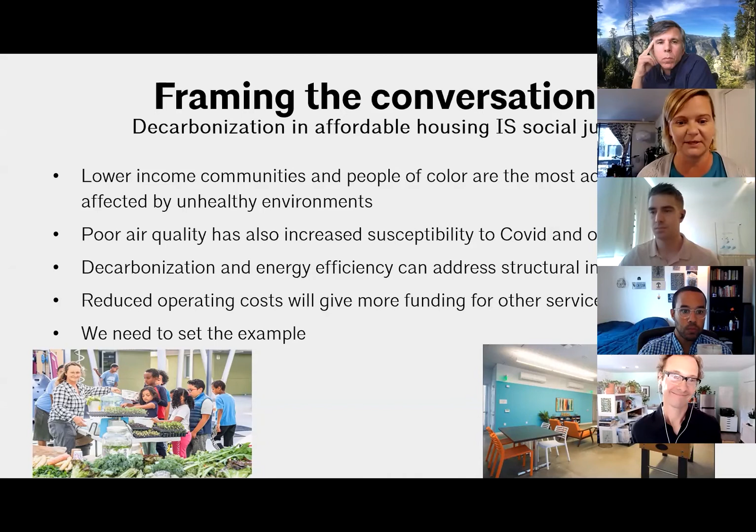The other thing I think we want to talk about today is the future. There's a lot going on that gives us things to think about. But when I think about my goals for building affordable housing, I'm thinking 10, 20, 30 years out, and thinking not only does the housing need to be economically sustainable for the families living there, but we need to think about where things are going.

Thinking about the fact that if we don't all adhere to the Paris Climate Accord and do our part to keep global warming down—and that means every single building—then we're going to be in a catastrophic situation. So the sooner we start addressing it, building by building, portfolio by portfolio, the better.

When I think about the future, I think about buildings like the one you see below, which is one of our buildings that was completed about 5 years ago. They're all going to be energy efficient. This particular building is producing as much solar energy as consumption, so it's basically net zero. I think all buildings are going to need to be like that. The grid's not going to have the capacity to serve the future, so we need to all start doing our part now.

The housing also needs to be in places where it makes sense. There are a lot of smart growth principles I'm sure you're all aware of, but housing should not be in the outlying areas. Housing should be in areas where there's already a good supply of quality jobs, quality transit, schools and parks. When I think about the future, I think about walkable neighborhoods, not sitting in gridlock for 2 hours to get to my job. That's where I think we all need to go as an industry.

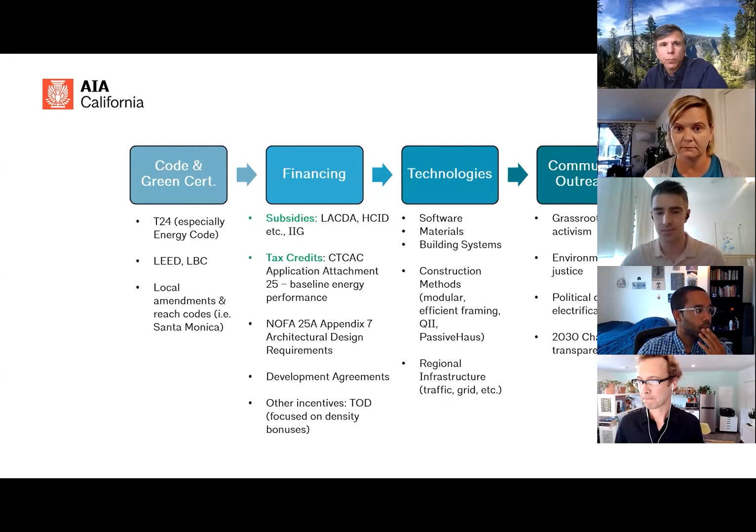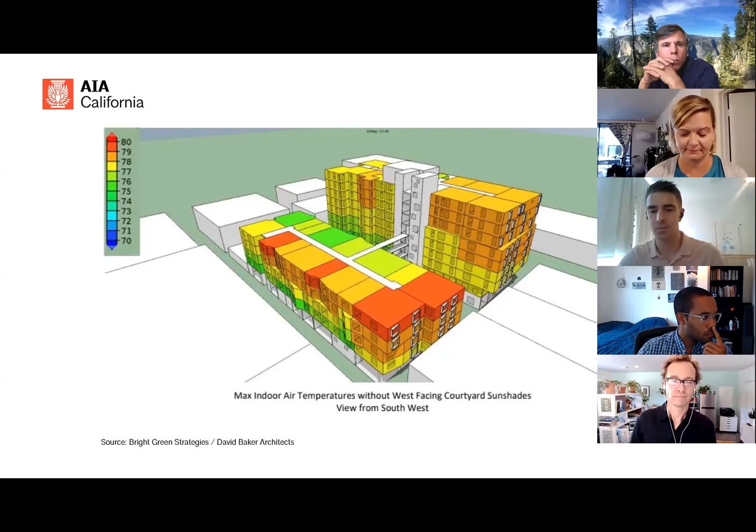This is a really great image by David Baker Architects. It's a simple diagram of units in a mid-rise application, which is what we're generally working in for affordable housing, where units are modeled without sunshades to show which units receive the most solar heat radiation. You can use these easy to understand graphic tools to focus your material investment in terms of where you want to put sunshades and more cost-intensive materials, because we're typically working on fine margins in affordable housing. So when thinking about value engineering, you want to make sure your materials go where they can be most effective.

Team building is another really important way an architect can contribute to the process of decarbonization. It's really about building a great team that has experience in creative thinking, shared values, and probably most importantly, collaboration, because we want to make sure all the team members are talking and have the same goals in reducing energy use and providing the most sustainable, long-lasting building possible.

It's also really important to effectively plan and prioritize to ensure successful results. We want to set ambitious but realistic goals at the beginning that we can achieve with sound fundamentals and cutting-edge technologies, and really decide where we can make the most impact for the least expense. That usually means prioritizing passive design strategies and right-sizing program by putting shared facilities such as play and laundry as outdoor or unconditioned social spaces, so they serve a double function as both building infrastructure and social space that becomes part of the architectural design.

It's also important to consider what makes the most local sense in your area—access to expertise, materials, clean grid energy, and on-site renewables—and to have architectural responses that are climate oriented.

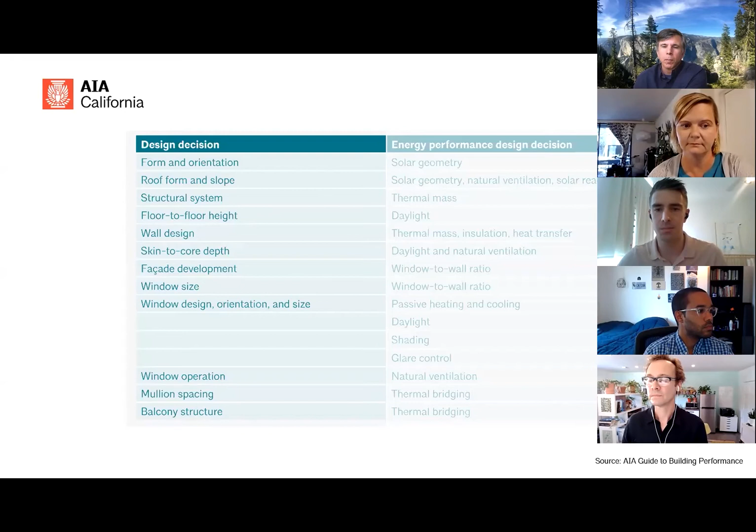When we talk about design decisions, we're typically talking about form and orientation, roof form and slope, structural system, and so on. But I think it's important to think of these as both decisions and the energy benefit we receive from them. When we talk about form and orientation, the benefit we get from an energy use standpoint is solar geometry and access to sunlight, both for powering your PV system and for daylighting in units, courtyards, and planted areas.

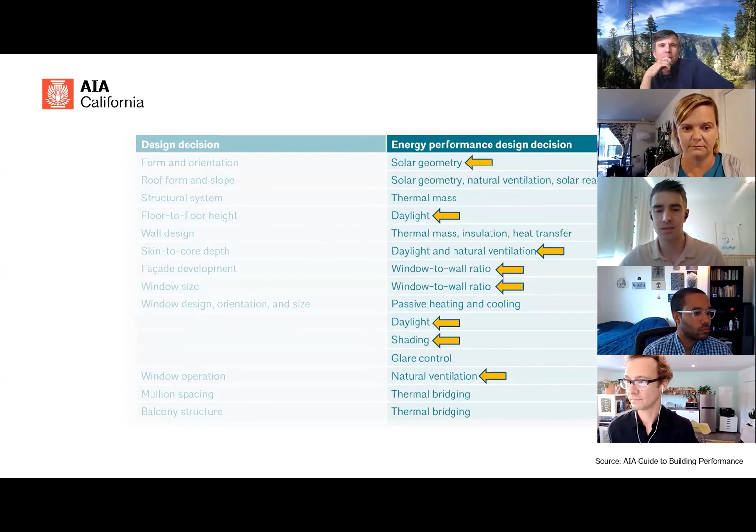That's really what we're trying to do with passive design strategies - cut down on any loads that build up, so you don't have to account for them with active systems.

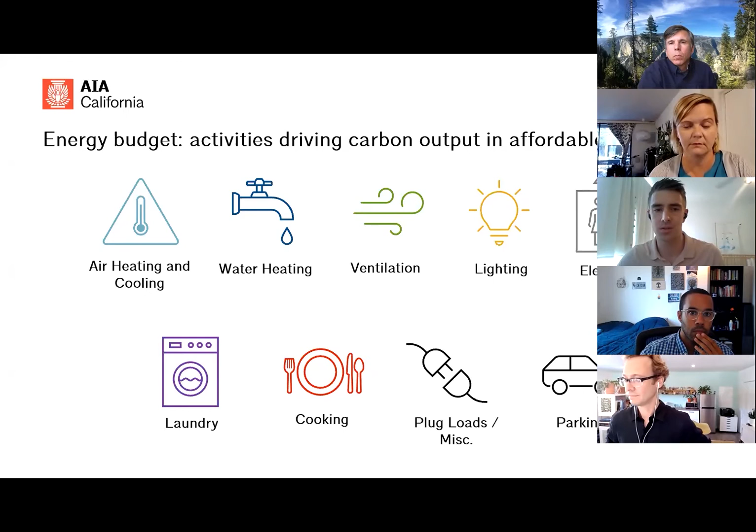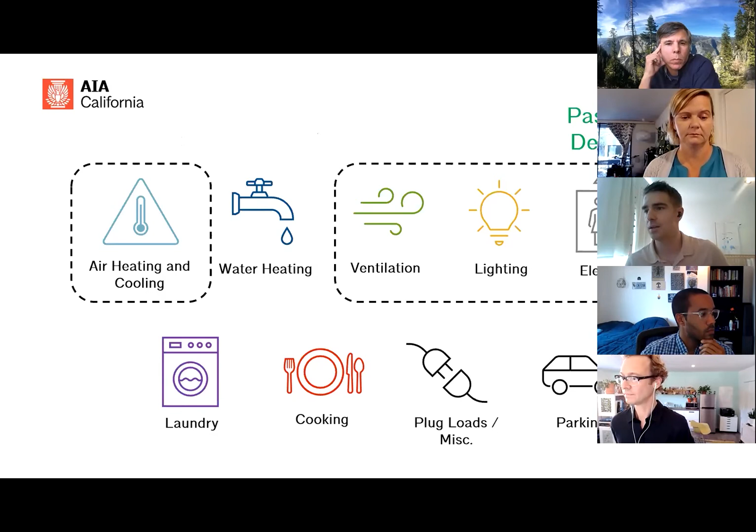Energy use that we can tackle generally with passive design: air heating and cooling, ventilation, lighting, and elevators. Just by proper orientation, proper window-wall ratio, orientation towards views and daylighting, you can really knock a lot of energy use off your baseline.

So these are examples of components of the building where we'd want to address better technology. Water heating is a big topic these days with heat pump technology. SCE is now incentivizing purchasing domestic heat pumps, so it's really a technology that's growing.

Laundry is another interesting example. Generally we provide centralized laundry because it's part of NOFA, one of the financing organizations, so we're supposed to provide laundry machines. But it's also an example of equity - you need to provide infrastructure to the building that really makes it feel like a home, like it's domestic, like you're getting all the amenities anyone could expect in a home.

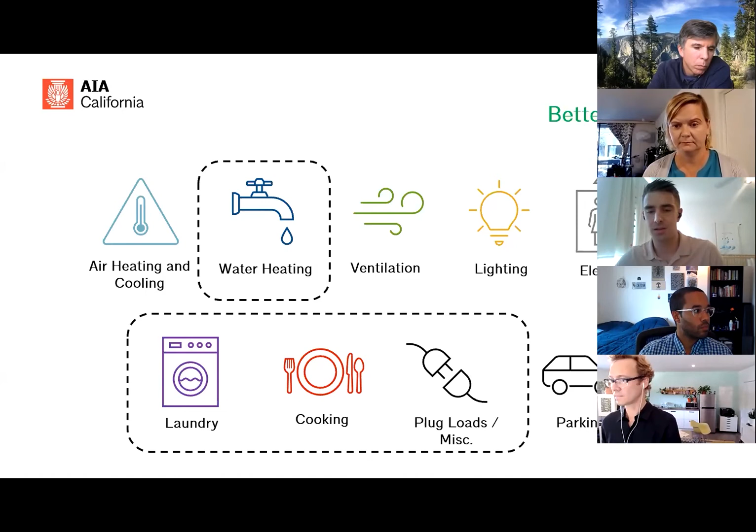So we wouldn't do things like provide balconies that are too narrow, or just a place to hang clothes, because those can feel quite institutional if they're not really good.

This is a project we're doing in Walnut Park in East Los Angeles. This is an all-electric building, and I wanted to point this out because we are designing it with a centralized heat pump system - 2 Colmac units and 3 storage tanks.

The size of the pump room we put on the ground floor was only 300 square feet, with a ventilation grill to the outside for fresh air movement. We were surprised at how small that was for a 58,000 square foot building.

We're also providing ceiling fans in every bedroom and living room, because one of the best ways to prevent someone from using the air conditioner is to provide a ceiling fan. We find it's a very low energy use technology - it's an old technology, and it really works well.

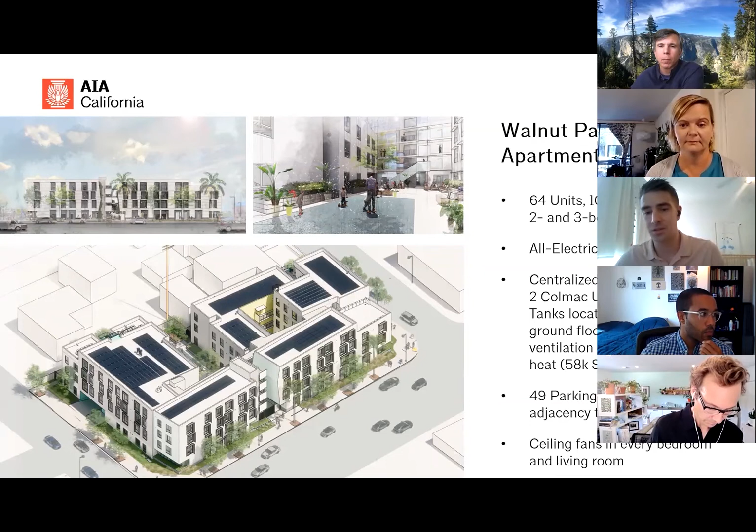This is a building at 1015 Vermont, near Los Feliz, on top of a metro station. Reducing vehicular miles traveled is a great way of decarbonizing housing, and providing a minimum amount of parking stalls required.

We're only providing commercial on this one because it's a mixed-use property with some retail and restaurant. But this is also a good example of how rapidly laws regarding electric vehicle charging stations are changing. There was a new ordinance issued by LA in January 2020 that requires far more EV infrastructure stalls and installed parking stalls required. The laws are changing very rapidly with regard to EVs.

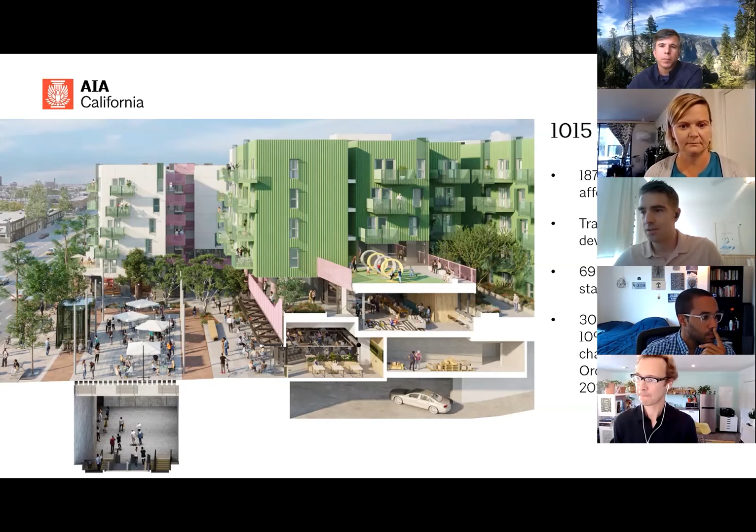This is Flor 401, a project we're doing in downtown Los Angeles. This highlights a number of challenges we face with urban infill projects.

You want to get enough light into the courtyard, so you design a wide courtyard, but you get very narrow floor plates, especially with studio units, which are narrow as it is. If you look at the top right image, you can see how much space is taken up by the maintenance area, the tiebacks, and the parapet-mounted mini-split heat pumps. This takes up a lot of room, so by the time you're able to install a PV array, it's actually quite a small area. You really need to just take what you can get.

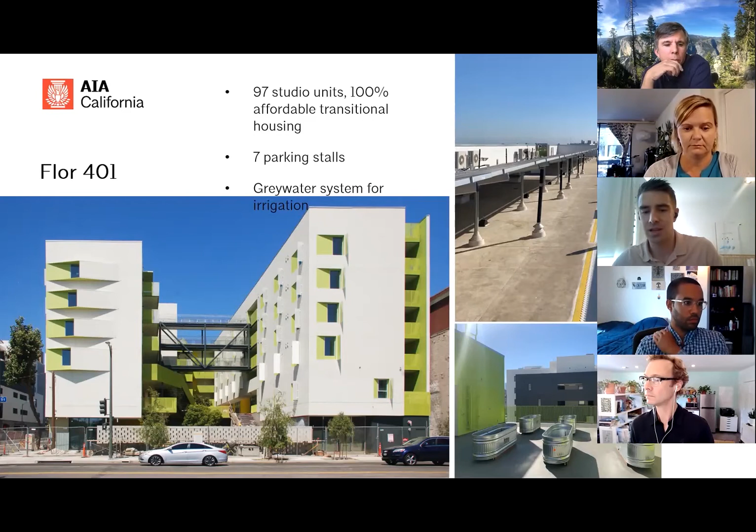I want to touch on materials for a second, because there are fossil fuels within materials, and there's a really great study about how many times fossil fuels are referenced in architectural specs. It's mostly in 4 sections - 6, 7, 8, 9. If you take a look at this small slice of materials and do a good job, you can really eliminate a lot of fossil fuels by choosing the right materials.

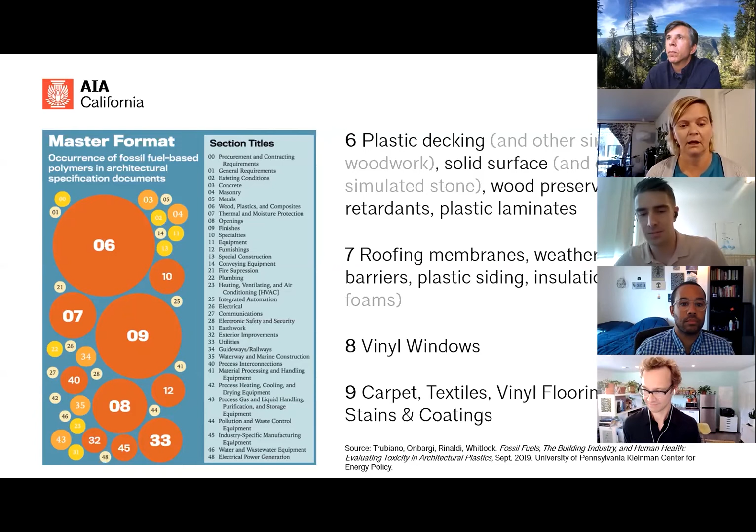Next. And that's pretty much it. I've made a list of other challenges and opportunities, but I'll just hand it over to the next person.

Well, it looks like a little surprise here. We changed the order slightly, but I'm ready to go. Hi, I'm Jason Lorcher with Green Dinosaur, and I hope everyone can hear me okay.

Next slide. So obviously today there's a lot of conversation of what the new normal looks like after the pandemic. And for the purpose of our roundtable discussion, I'd like to pose the question for everyone here on the call: how do you envision our industry will evolve?

At Green Dinosaur, we've pondered the question ourselves. For us, it's a new normal of an all-clean, all-electric path that creates opportunities for people in our world based on social justice. It's really time to evolve how we design, build, and work. We're hoping to get some of that today with all of you in this conversation. Next slide.

So I'm going to review two projects with everyone. Both projects were envisioned around the same time frame, around early 2012, 2013. So they've been 7 years in the design. From design, they've probably been in operation for the last 4 years.

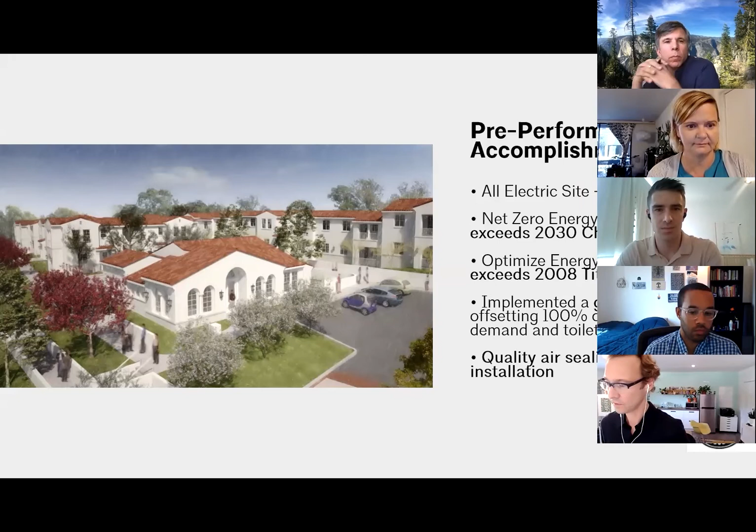So doing an all-electric building, you really want to focus, as John mentioned, on the envelope and your materials and shading, and really bring the energy down. In this job, under an older code cycle, it was achieving 50% better energy performance, and that's before you even take into account photovoltaics. Next slide.

So we had the Silver Star Apartments. That was a 49-unit, formerly homeless vets project in Los Angeles, also targeting Living Building Challenge, and was all electric.

Once again, this project had a similar design of mechanical, electrical, and plumbing systems to go all electric with domestic hot water heat pumps, also with a sizable photovoltaic array on the roof - a 160 kW photovoltaic array - and split system heat pumps, super high efficiency as well.

Next slide please. Kind of a final note, looking at this overall diagram, you can see photovoltaic panels on the roof, and it's exceeded performance by 50%.

So we're looking at these projects that were under 2008 Energy Code, 2013, 2016. Now we're in 2019, looking forward to 2020. Also very excited to see the AIA submission backing an all-electric design that was submitted recently to the CEC. I wanted to mention that as we move through these different code periods, as the time-dependent values have become more stringent, we could expect maybe a 50% performing 2013 project to maybe look like 5% better than 2019 Energy Code. Just a side note. Next slide.

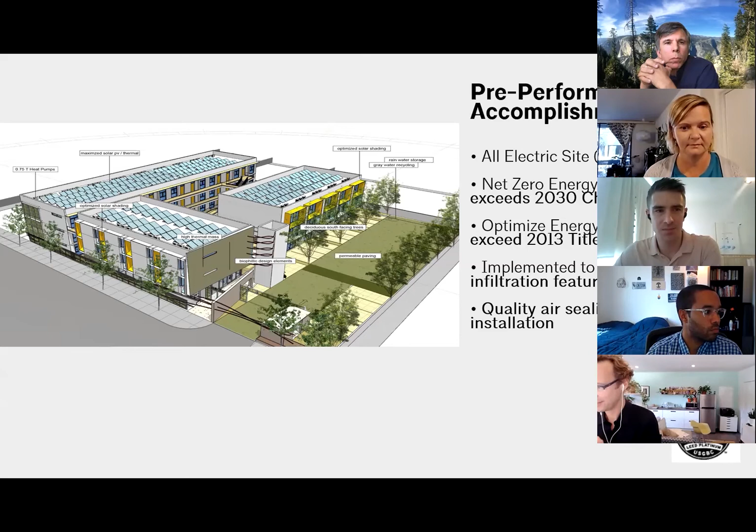I'm going to talk a little bit about challenges and opportunities. Some things I wanted to mention: conceptual design and understanding how energy use is a big factor at this stage of a project. Everyone's well-versed with how to run charrettes and make project goals. Early energy analysis takes place to understand loads and how to orient, mass, and site a project. This is nothing new, but there are complexities we'll need to engage utility companies on, like the demand on electrical service size.

I want to make one plug here for a company called Redwood Energy. They have a great guide that initiates conceptual design goals, called the Zero Emissions All Electric Multifamily Construction Guide. We'll provide that link later, but there's so much information out there right now, whether from the Rocky Mountain Institute or the Living Building Challenge, about all-electric buildings, that should really help our industry move things forward.

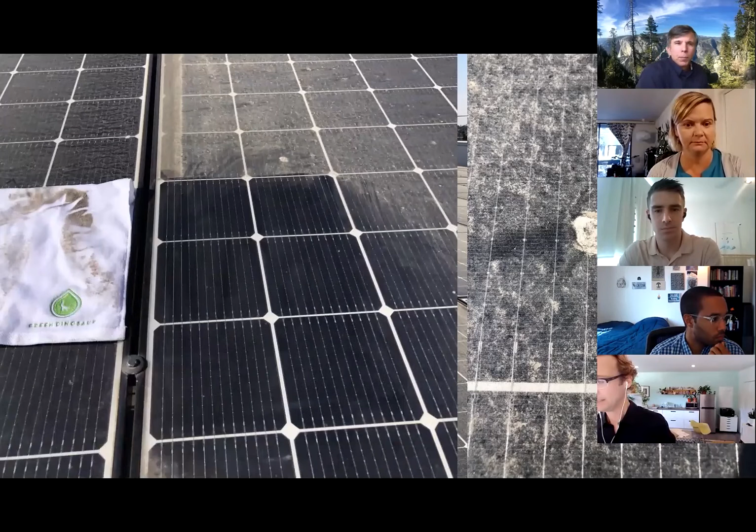Another feature, as you wipe down, you see how they would look when clean. This residue was probably over a 4-month period, which is about a 15 to 30% reduction. A lot of affordable housing developers on the call might be saying, well, how do I budget for the cleaning costs and all these things?

Quite frankly, there's a lot of challenges to make sure that we can continue to achieve the performance on these high performing buildings.

Then it comes to the next challenge and opportunity of accessibility, maintenance, and positions of solar systems. It's so important to verify and maintain systems. If you're walking up 3 stories to get to inverters, I know we have everything tied into an IP address, but if you really want to verify that inverters are calculating the production of the panels and you're going to maintain it, you need to think of these things up front and make it a priority during design.

That goes true with balanced ventilation systems, fan coil units. As architects, we always want to hide all the beautiful mechanical systems, and that makes me sad, but we've got to figure out ways to do that.

Another challenge and opportunity we can probably discuss in our roundtable is the ongoing training. Since this was primarily focused on decarbonizing housing and affordable housing, the technical expertise on maintaining the buildings is slightly limited, and we really need to work with everyone.

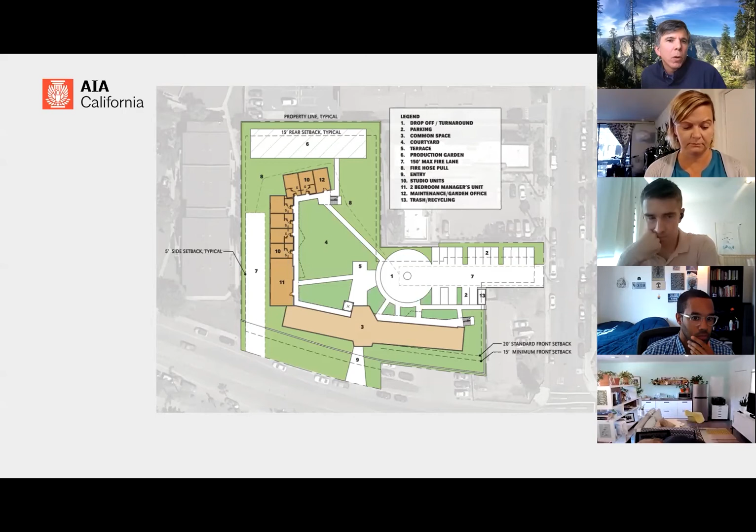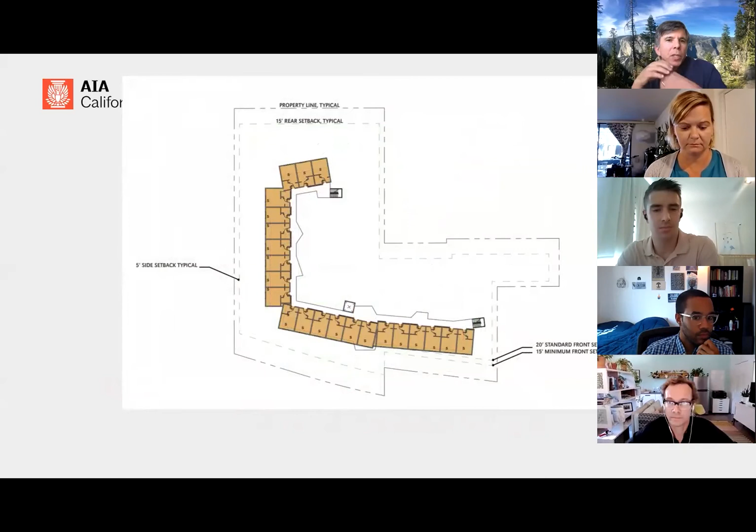So let's take a look at how we approach our projects. There's a couple slides here, courtesy of Studio E, who we work with down in San Diego—some projects we've finished and have ongoing with them. This is San Ysidro Senior Village, a 51-unit, 3-story project centered around a courtyard. It's housing for the formerly homeless in San Diego.

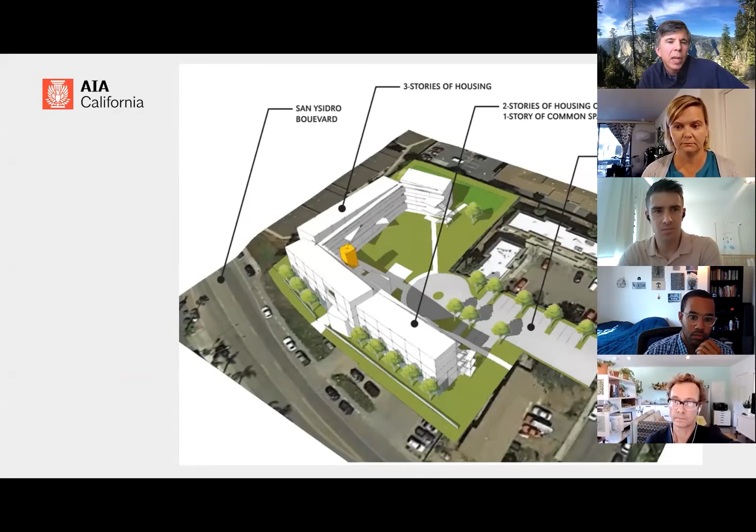And it's built on a shoestring budget. So when we looked at this early on, the architecture team came up with a strategy to maximize use of the site, create great outdoor spaces, and what we like to call some signature architecture. But we had to do this on a budget, and I always have goals for deep use and deployment of renewable energy systems. So on calls with our design teams, they constantly hear me say, I like that idea, but I really want renewable energy. So we've really got to conserve in the way we approach this.

The key to any good process is a study of the economics. It can't just be landing on ideas and the newest thing, saying we've got to do this, even if we're talking about electrification and carbon neutrality. What we have to really focus on with the affordable housing community are the economics of this.

So before we get in, let's look at this economic analysis I did for San Ysidro Senior Village. You do a conceptual energy model, and I'll show a slide of that in just a second, and you take that energy use profile and plug it into something that will identify what your operational energy costs are going to be.

So, 51 units of special needs housing, master metered. My operational energy costs for this project are going to be $56,000 a year. This is what the development team is going to plug into their budget, right? On a normal day, $56,000. So then I look at it and think, that's a lot of money. We'll take a closer look at that.

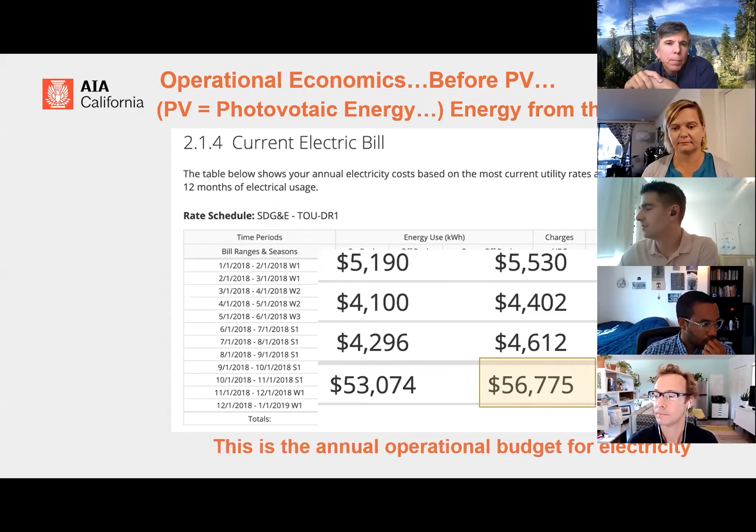So to look at this a little more closely, what we need to do—hit the next one. So designing for PV now, Title 24, I call this PV 101. This is what we all need to be doing. This is a new project we're starting, or this is still San Ysidro Senior Village.

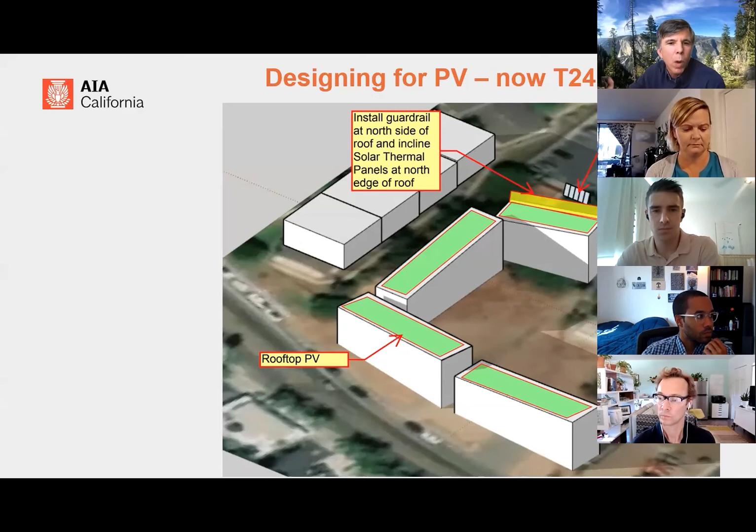We started looking at the way we would deploy PV on the project, and maybe the way we would use solar thermal, because the project was conceived with natural gas originally, and then we started wandering into the AIA 2030 challenge. And we hand that off to our architect.

And what the architect does for us is come up with these ideas to get it on the building in a way that we can then look at the renewable energy footprint versus the utility grid footprint.

But this has meaning for us. So when we look at the architecture of this, it needs to breathe sustainability. It's important, right? But to me, it doesn't matter—if it makes the point and it's sustainable, it's going to be more poetic.

So when we finished the project and landed as much PV on this building as we could, it tells a really compelling story for us, but that's a coincidence. It's important to me, but it doesn't need to be featured. It doesn't need to be in your face.

What's really important to me is getting back to the economics of this. So when we start new projects we want to keep in mind our long-term targets, and we're looking at reporting to the AIA 2030, the AIA-DDx. So, a zero net energy building, or very close to it, with a lot of PV on the roof—I thought I should be doing pretty good, right?

So anybody looking at the DDx is used to the energy use intensity, the predicted energy use intensity. That's my number, my predicted number from my energy model when I was all done. That was my goal—I was supposed to be at 9. I was at 23. And I'm slapping myself and the team on the back saying, hey, that's a great project, we almost got to zero net energy building.

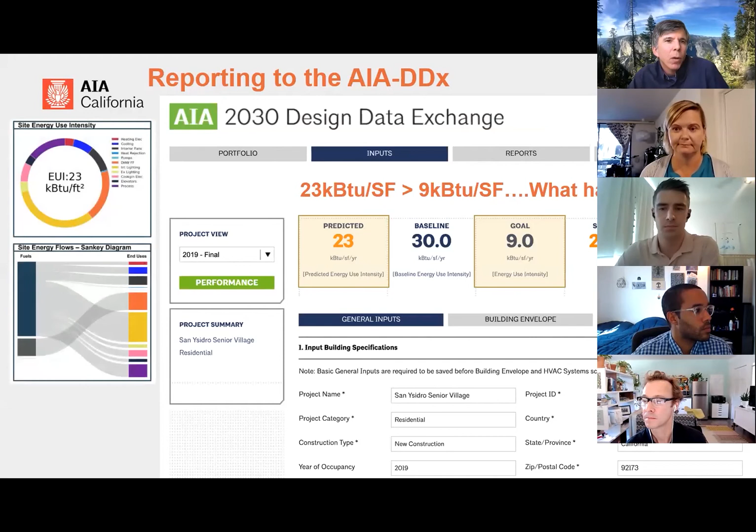So if you look at this, this is really important—the most important thing if you're working in affordable housing, the most important discussion. Natural gas has been tied to heating hot water for the longest time. Central systems are the most important things to put in, but they suck up 20% of your building energy, right?

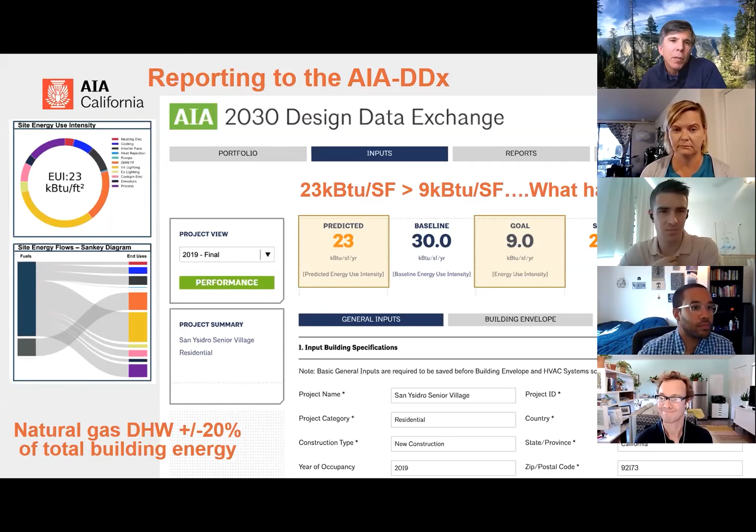So if you think you're going to have a zero net energy building and you have a natural gas boiler, you're going to be looking at me, and you're going to suck it up, and you're going to put your numbers into the AIA-DDx and say, yeah, we tried. We had a lot of PV, it's great, but it still sucks because it's got a natural gas boiler. So we've got to approach it a different way on this.

So the next project we're looking at, the day one approach, you've got to look at the analytics. So this is San Ysidro Senior Village again, another project with Studio E.

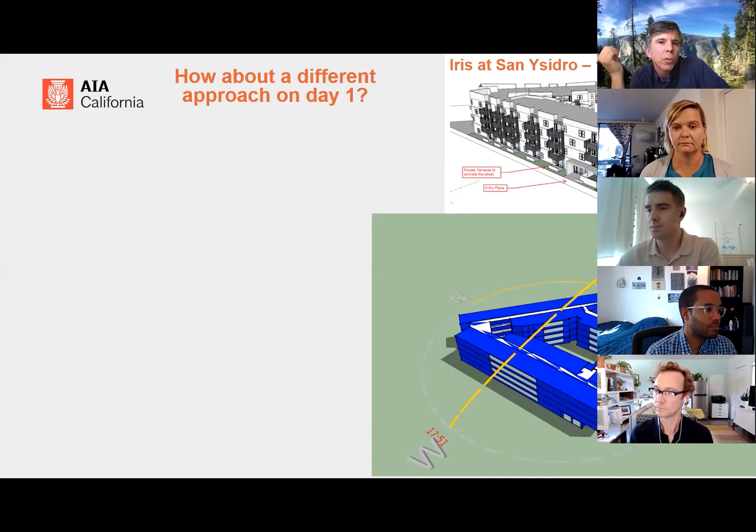And what we did on the first day is I get in and look at the conceptual energy, simplifying the design as much as possible. It's just a heat balance equation. You don't need to define every single window. You need to understand what your window-to-wall ratios are, where your residential units are, where your commercial units are, and what the orientation is. Then you can start describing what the wall assemblies are.

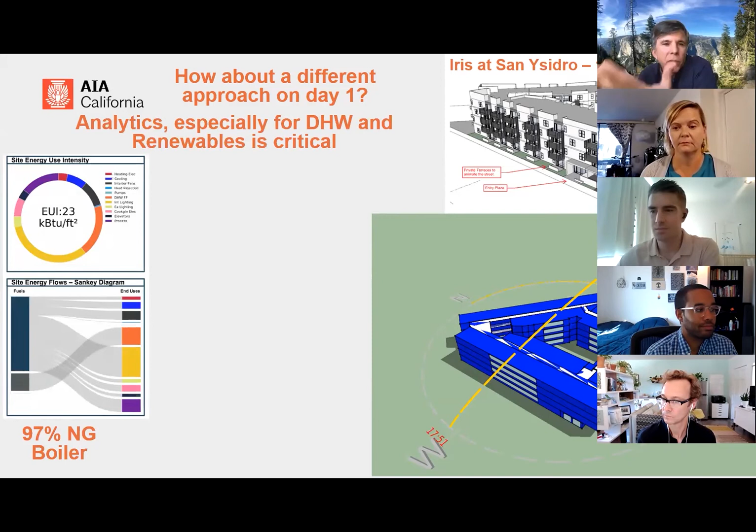When you look at this, you can start to look at things like the domestic hot water. So here I am, step 1: 97% efficient natural gas boiler, predicted EUI 23. Hang on a second, let's go with the heat pump boiler. New technology, it's out there, the state's pushing us in that direction. I just cut my energy use down because my heat pump boiler is 3.5 times more efficient than the most efficient natural gas boiler. So suddenly I'm doing really well, but I still have to make the economic argument for this.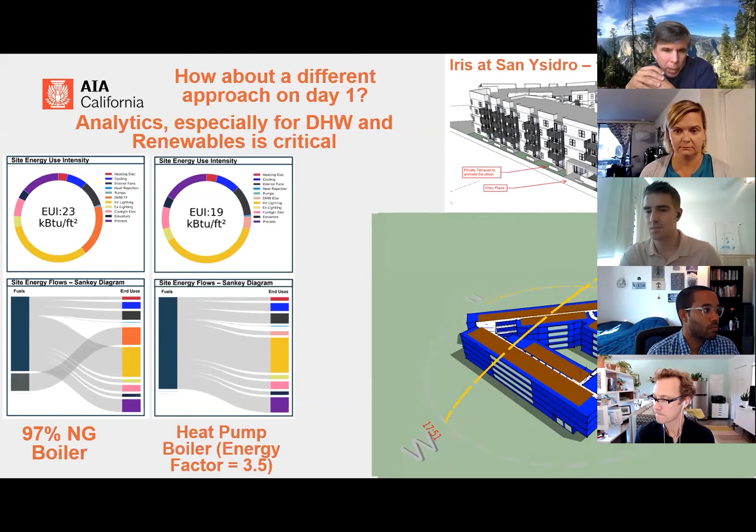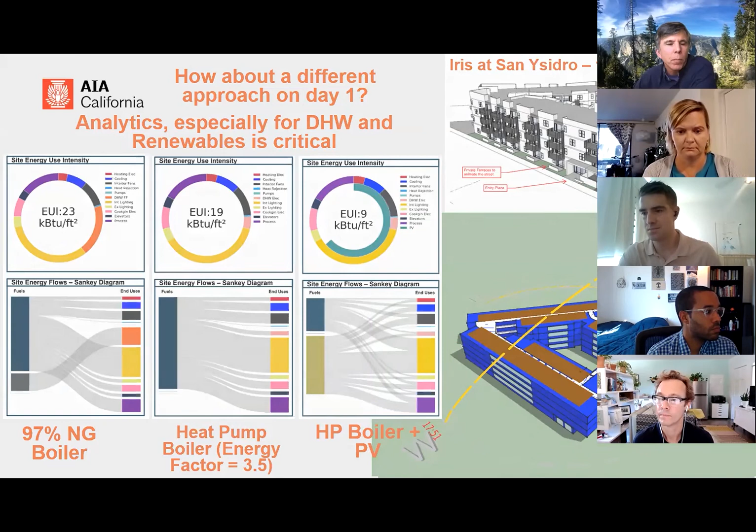So the last piece of this is, now I'm going to drop on some PV. Now we're talking, now I'm going to make some money. So with good modeling software, on day one before you do anything, you've defined what your goal is in terms of energy use for the AIA DDx. You're looking at your economics, giving the owner decisions so they can look at their operational budgets, and now you can actually start making the argument that this makes economic sense.

So let's go back to San Ysidro Village really quickly to finish up that conversation. You got to buy the PV system. And I always tell our development team, hey, don't worry, if you can't buy it, we'll find a way to get it on the building. So this was the breakdown for the lease: if I'm going to lease the system because I don't have enough money to buy it, my PPA, my lease payments are $16,000 a year, but my normal costs were $47,000. So I'm making $31,000 a year just by leasing it. Why would you not do this?

But maybe you get to the end of your project with some owner contingency left over, which is where I like to live, because PV is the last thing I'd put on a building that still makes sense — maybe battery storage would be a little better. But what if we bought it? On this one, the system cost for San Ysidro Senior Village was $316,000, with a 424% 25-year return on investment. So anybody who wants to take their slush fund and make money — start another fund, reinvest in my projects, Tara's projects, give me 2 or 3% return, you're doing great.

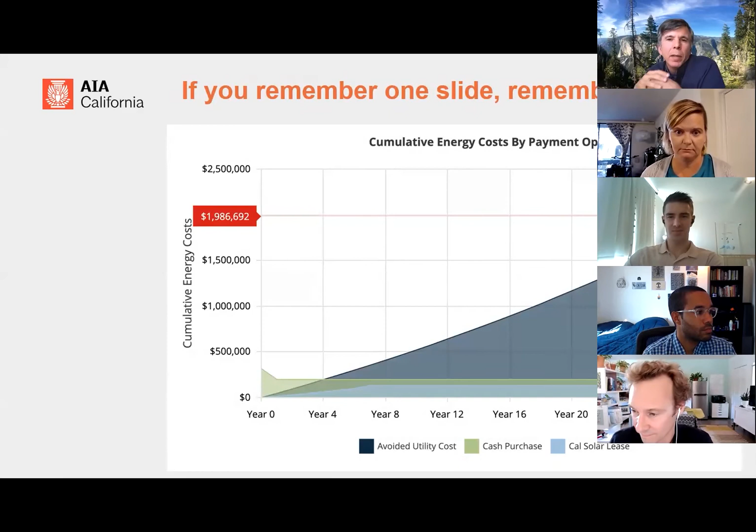But what does this look like over time? This is the key: my operational budget on this project went down to $9,200. My operational savings here, $47,000. I really want to be clear with this — if you remember anything, remember this slide. So, 51 units of senior housing for the formerly homeless: my operational savings over 30 years is $2 million. The big growing curve there is the growing cost of utilities — just keep paying SCE, keep paying SDGE, that's what they want you to do. The lines on the bottom are the lease cost and the upfront cost. The green cost is the purchase cost, so you can see it has a bit of a peak angle to it.

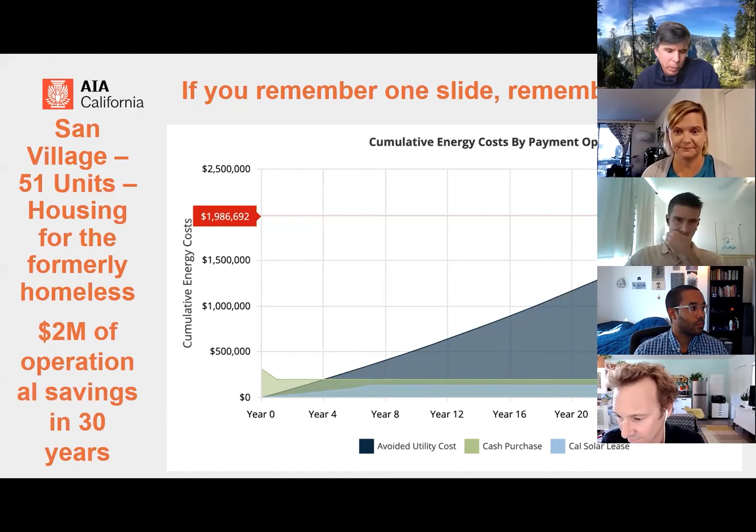But we had money left over on this project. We were smart in building, didn't have a whole lot of change orders, so we bought it for free — our number is actually at 0. So the operational savings are going to be more than $2 million. And this is the message for the affordable housing developers out there and anybody who services them: what can you do with the savings? It can't be about proclaiming your greatness and hugging trees and preserving the environment, which is really important to all of us. It really needs to be about benefiting the people who are actually going to be living in the building. These are people moving in on their first day, formerly homeless, into San Ysidro Village. So what can you do with this money?

Okay, this is just the first step in social justice and environmental justice. Do you want to give the money to the utilities? They would love you to, right? It's an annuity for them. Would you rather hold on to it yourself as a developer of affordable housing? Would you like to preserve it and invest it in other things? We got plenty of ideas at National Core what we would like to do. It is about service and delivery, and we're in it for the long haul. And I think for anybody who's developing or designing, that's really got to be the message.